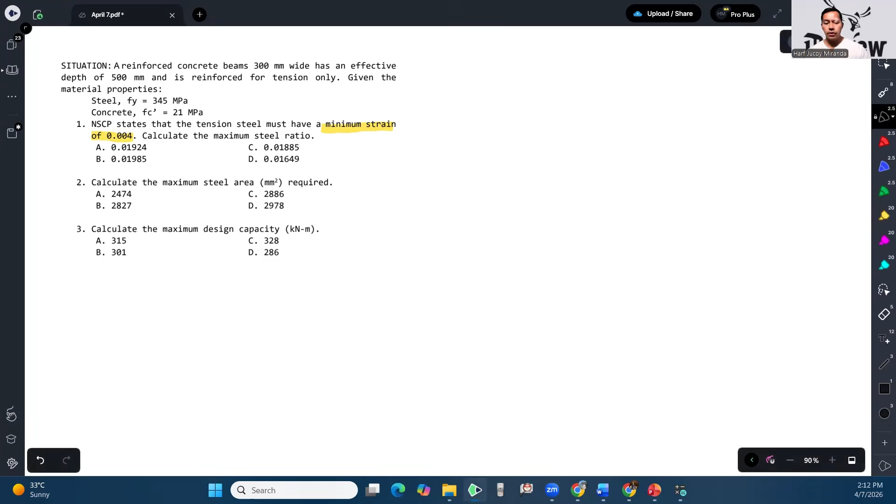So to calculate the maximum steel ratio, first we need to understand what it means for the steel ratio to be maximum. So let's have a beam. Let's say this is our beam, and this is the tension steel.

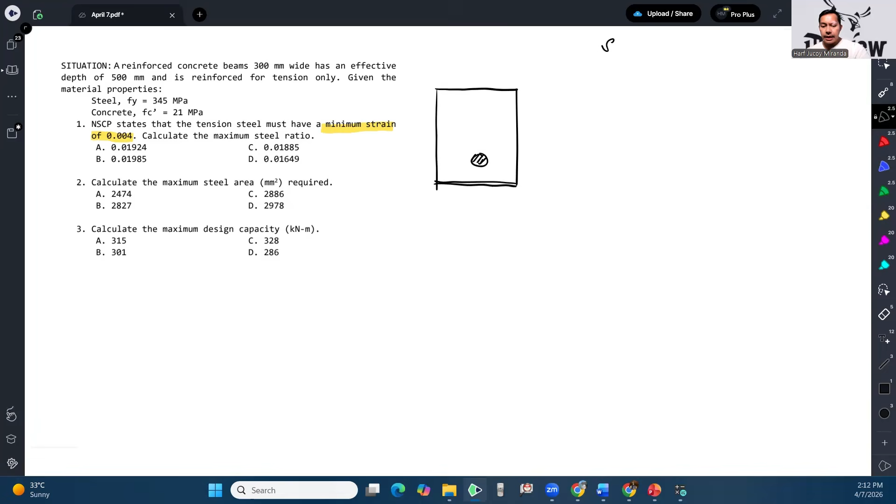We should know from the strain diagram, let's say this is the zero strain. So first, we need to know where the location of the depth of neutral axis is. By definition, the depth of the neutral axis, we designate that as C. Let's say this is the neutral axis, and this is C.

By default, the strain of concrete is 0.003. That's automatic. And the strain diagram should be linear. So if the neutral axis is here, this is what the strain diagram will look like, and this is the strain of the steel.

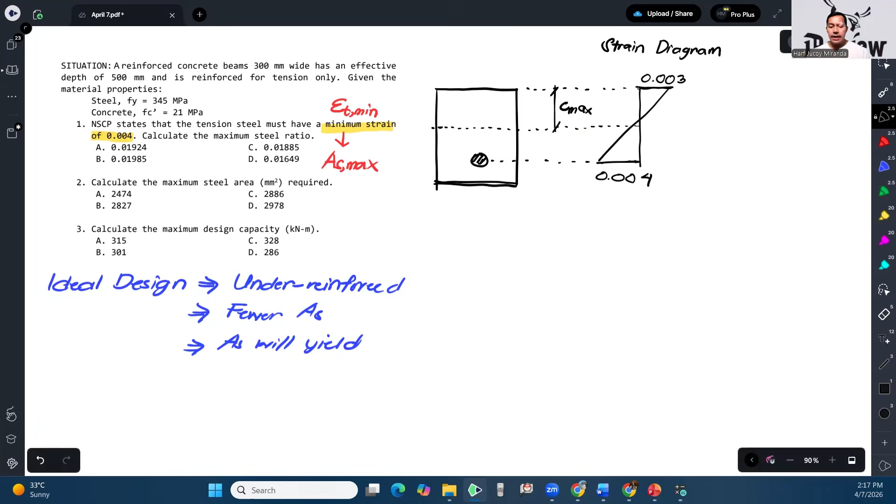And of course, this is our effective depth. By definition, this depth should be the depth of the bottommost steel, that is the effective depth of the extreme steel, when we're talking about the strain diagram.

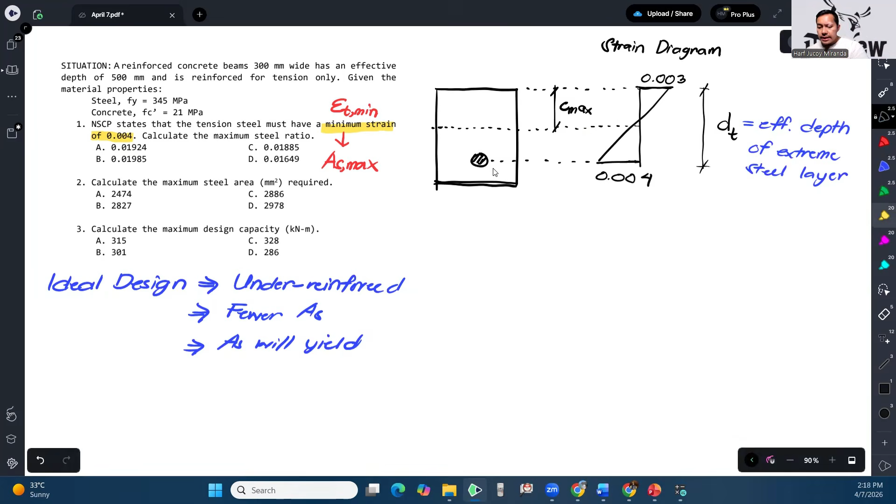Okay, kung multiple layers, pero syempre kung isang layer lang naman yung bakal natin, edi yun na rin yung effective depth natin. But anyway, by ratio and proportion, we can notice that we have this triangle. So actually, we can create this triangle, and we can relate that triangle to this.

So for this one, this will become 0.004 plus 0.003, magiging 0.007. So mangyayari ngayon, for the yellow triangle, we have C maximum divided by 0.003 is equal to effective depth over 0.007. Ilalabas dyan, yung maximum depth of neutral axis according to NSCP should be 3 over 7 of the effective depth.

Okay, so this is based on a maximum strain or minimum strain of 0.004. Now, we must also note that the depth of the compression block, yung equivalent rectangular compression block, is somewhere above the neutral axis. Ito yun.

Okay, so yan naman yung A natin. Since na minaximize nga natin yung depth of compression block, yan na rin yung depth ng maximum compression block. At ang relationship lang kasi nung C at saka A is that yung A natin ay equal sa beta 1 times C. So therefore, yung A max natin is 3 over 7 beta 1 times effective depth.

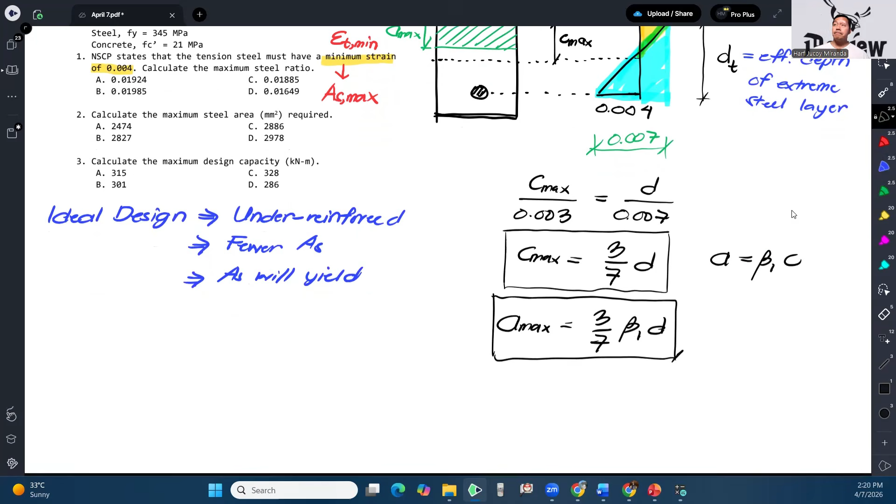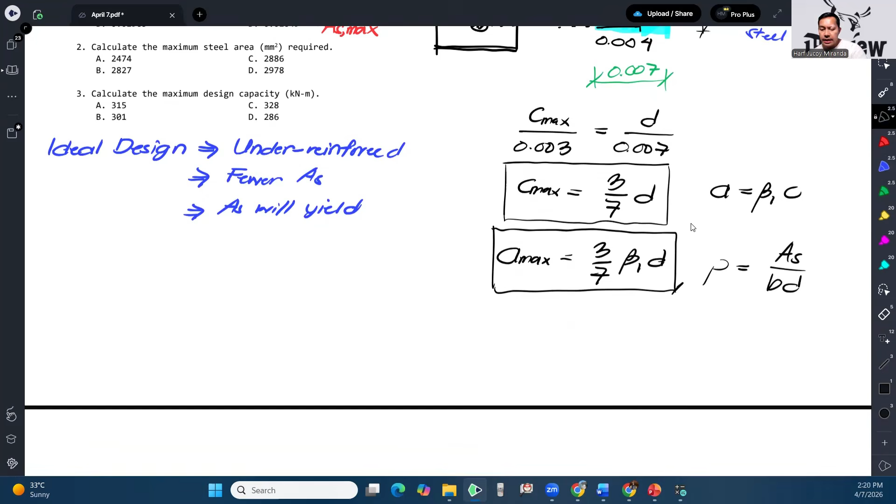Okay, now gusto ko malaman ano yung maximum steel ratio. Yun kasi yung tanong, steel ratio, di ba? So pag sinabi natin steel ratio, that is the ratio of the area ng steel divided by BD. So para mapalabas yan, ipapasok natin yung concept naman ng forces. So if we would go back here.

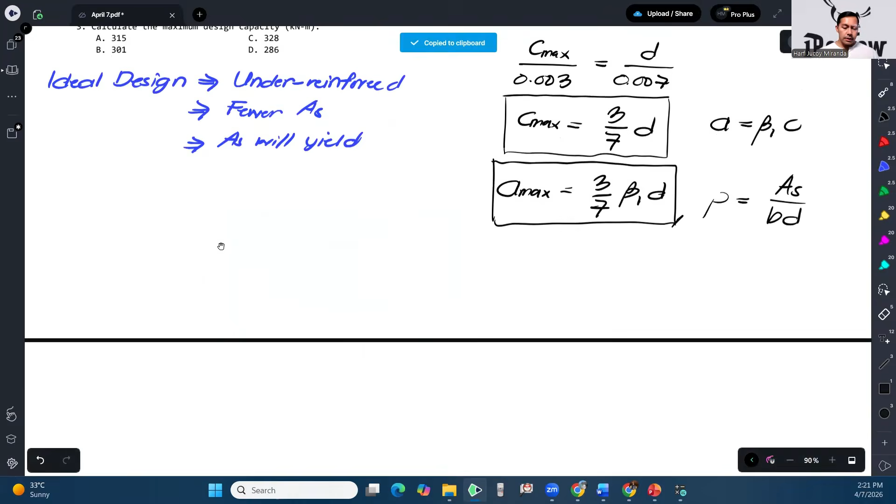Okay, so this is actually stress diagram. Okay, so actually dito meron tayong compression. Okay, yan yung compression ng concrete. At ang equivalent stress ng concrete ay 0.85 of the FC prime.

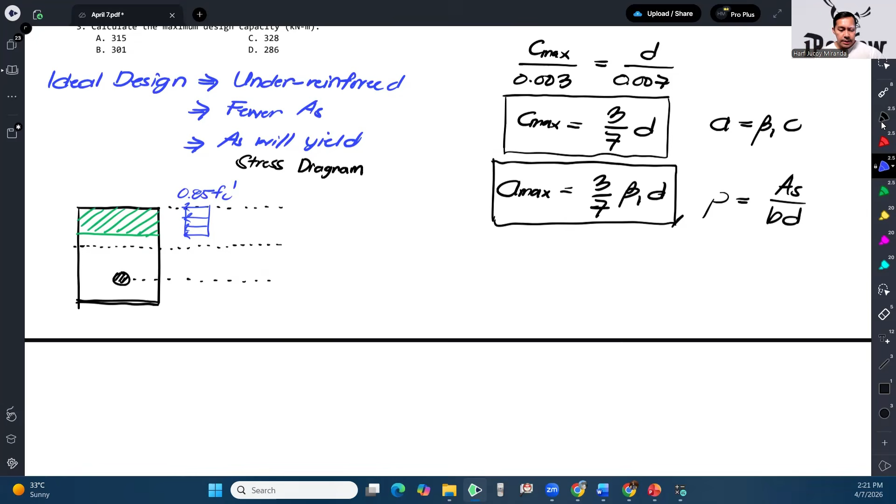Tapos dito naman mangyayari yung stress ng steel. Okay, and ideally, because gusto nating mag-yield yung steel kapag nagde-design tayo, this would be Fy, no? Pero originally ano yan, Fs, ibig sabihin yung stress ng steel. Pero again, it could either be Fy kapag nagde-design - matik yan na Fy kapag nagde-design, no? And then kapag ka nag-investigate, could be either Fs or Fy kapag investigation.

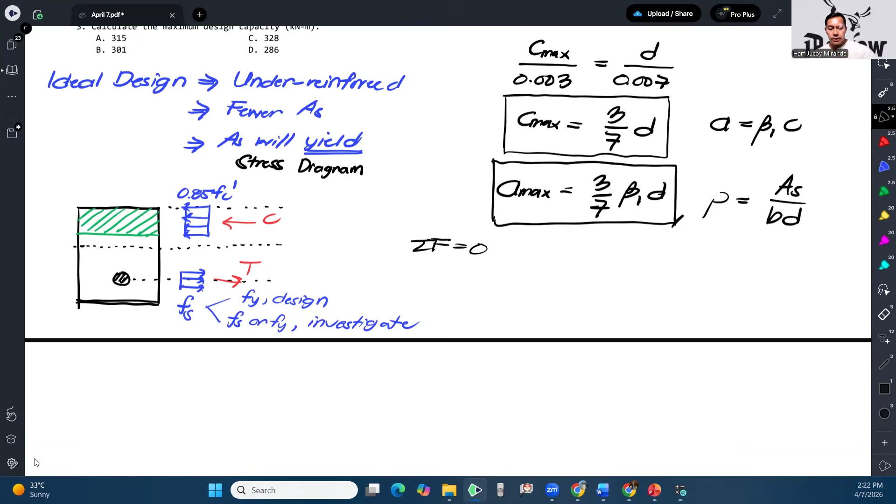Okay, so ibig sabihin, meron dito equivalent force C, tas meron dito equivalent force, tawagin nating T. And dapat, yung dalawang forces na yan ay equal. Kaya masasabi natin na kapag nag-summation of forces tayo, equal to 0, so lalabas lang C equals to T. Now, what is C? So C is yung stress na to multiply this area.

So ano tong area na to? Di ba yan yung A? Tapos, kunwari, ito yung B. Okay, so yung area na yan ay AB, or 0.85 FC prime AB. Parang lumalabas lang yan guys - stress multiplied by area equals force.

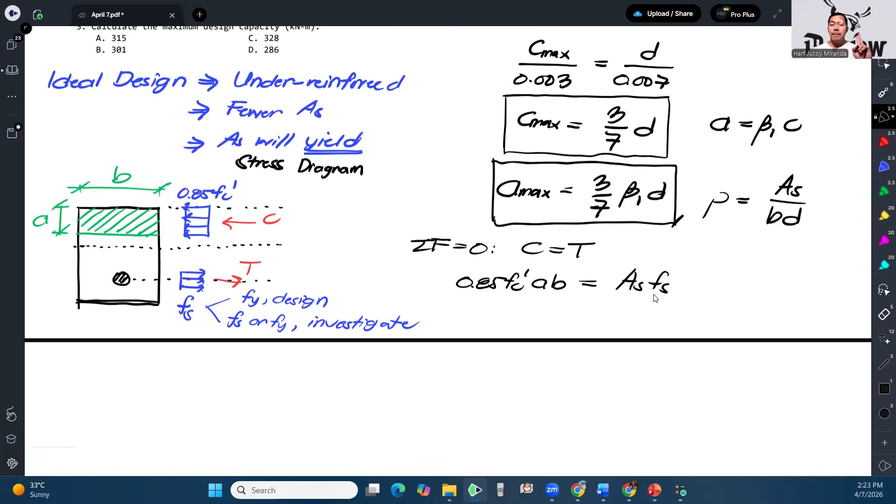Okay, and then equals T. So ano yung T? So yung stress naman dito, multiplied by this area, which is area lang ng mga steel, so therefore this is going to be AS times FS. Okay, so kapag nagde-design, again, automatic, we want this to be FY. Pangalawa, dahil ang hinahanap natin dito ay maximum steel ratio.

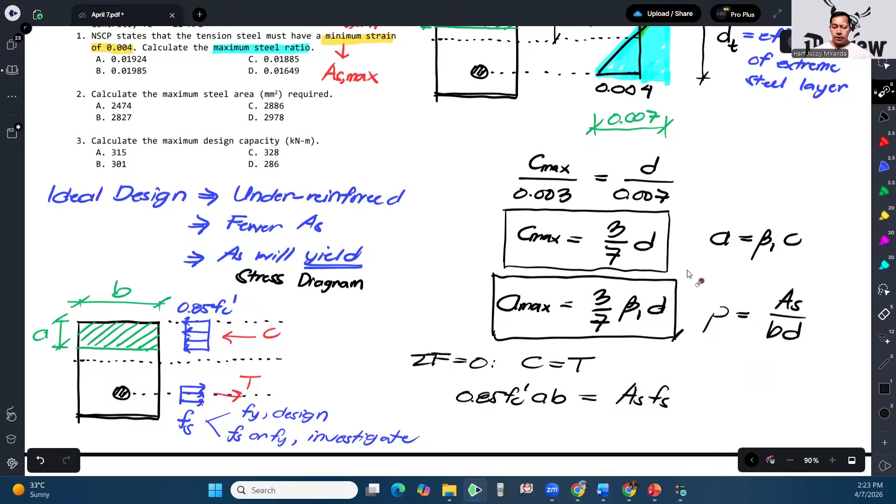So ibig sabihin, yung maximum steel ratio natin ay merong strain na 0.004, di ba? So ibig sabihin ganito. Note, when the strain in the tension steel is 0.004, mas malaki na yan sa tinatawag natin na yield strain. Ano yung yield strain ng bakal?

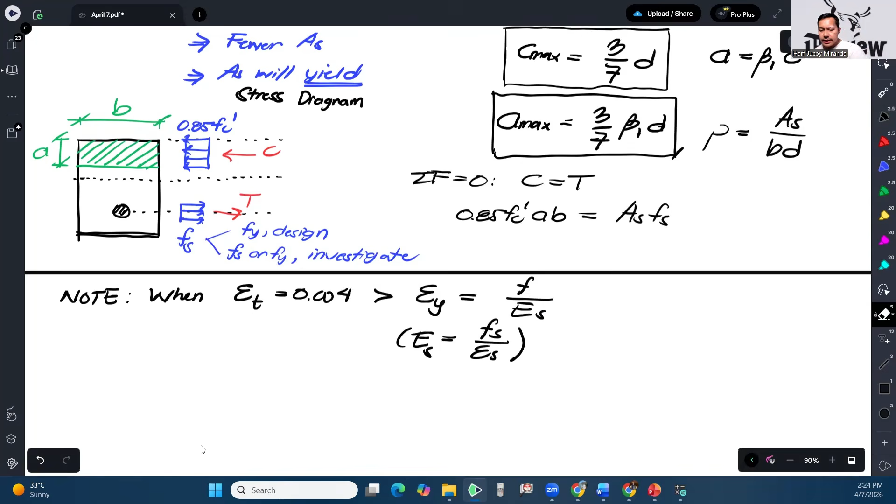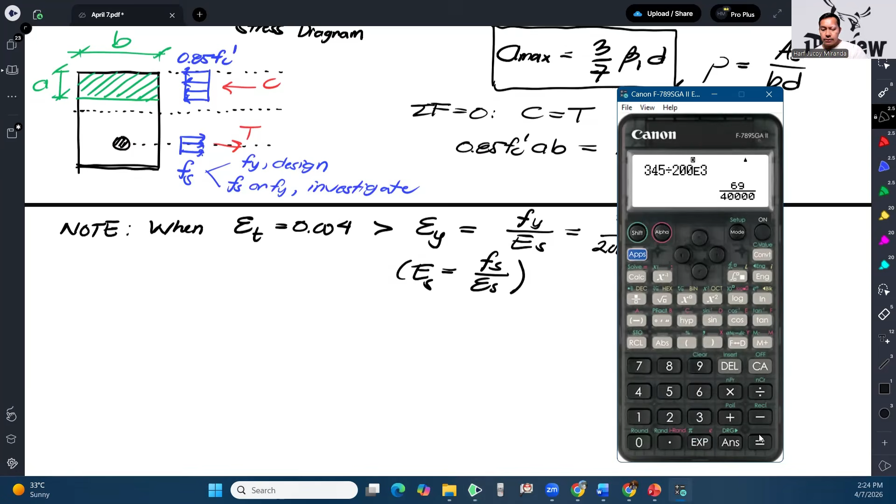Eh di ano lang, kasi di ba ang stress, ang modulus of elasticity ay stress over strain. Okay, so ibig sabihin, yung strain ay stress of the steel over modulus of elasticity of the steel. Na kung saan, kung yield nga yan, edi ito dapat ay yield stress. Okay, so sa problem na to, ang yield stress natin ay 345, divided by ang modulus of elasticity ng steel ay 200,000. Pag kinompute natin yan, we have 345 over 200,000, that would give us 0.001725.

So what does this tell us? This is telling us that the strain, when the strain in the steel is 0.004, it is already beyond the yield strain. Therefore, Fs is already greater than Fy. So therefore, the steel already yields - steel yields at maximum steel ratio. Okay, so therefore, automatic, ito, papalitan na natin ng Fy.

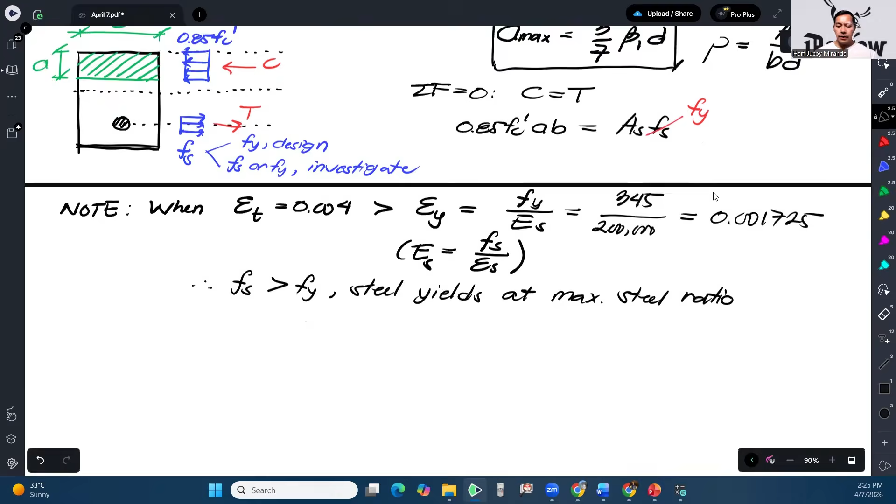Okay, so ipasok lang natin yan dito. So, 0.85 FC prime, dahil nasa maximum tayo na stage, gagawin ko tong A max, B is equal to AS Fy. Now, para lumabas yung steel ratio na AS over BD, ang gagawin ko lang is mag-multiply ako, or magdi-divide ako ng BD on both sides of the equation.

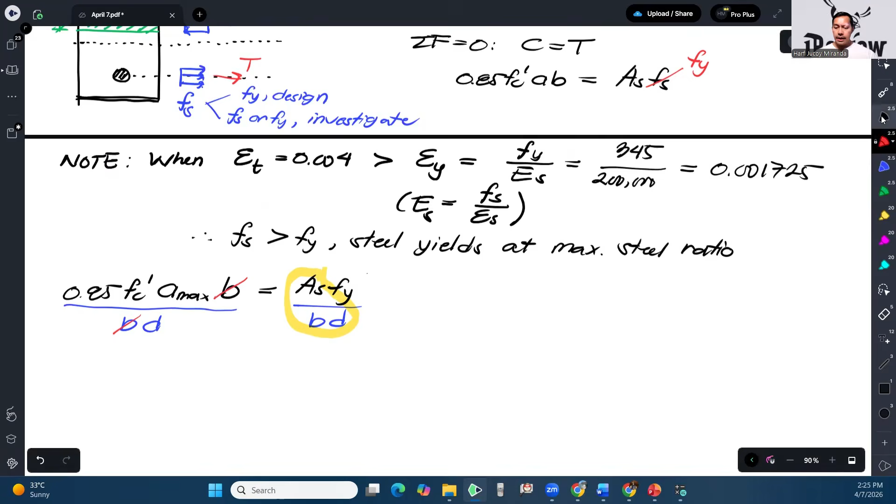Para lumitaw dito yung steel ratio. Di ba yun yung steel ratio, no? So, simplify lang natin. Magka-cancel ito. Okay? And then, magiging ganito: 0.85 Fc prime A max over D

equals rho, dahil max na yan, so max na to, no? Fy. Ayan. Okay? Now, lumilitaw that rho max, kapag sinolve natin, will become like this. So, 0.85 Fc prime over Fy, okay, times A max over D. Ni-rearrange ko lang. Okay? So, babalikan ko lang. Ano nga ulit yung A max? Ang A max ay ito, 3 over 7 beta 1 D. So, pwede natin i-substitute. So, pag sinubstitute natin yung dito, nga pala, no?

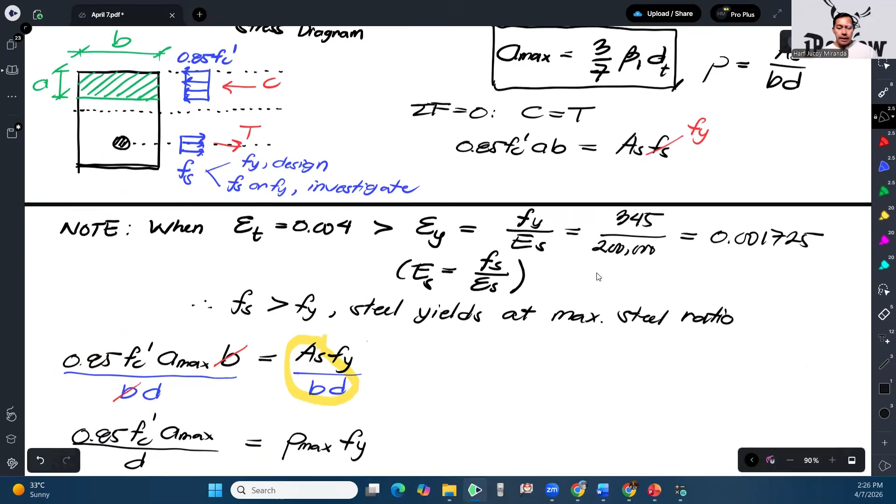To be more specific, again, ito ay DT, effective depth ng extreme tension steel layer. Okay, so palitan natin to ng 3 over 7 beta 1, 3 over 7 beta 1 dt over d. Okay? Now, rearranging the parameters, so lalabas ngayon that rho max is equal to 3 over 7 times 0.85 Fc prime beta 1 over Fy times dt over d. So, yan ngayon yung maximum steel ratio.

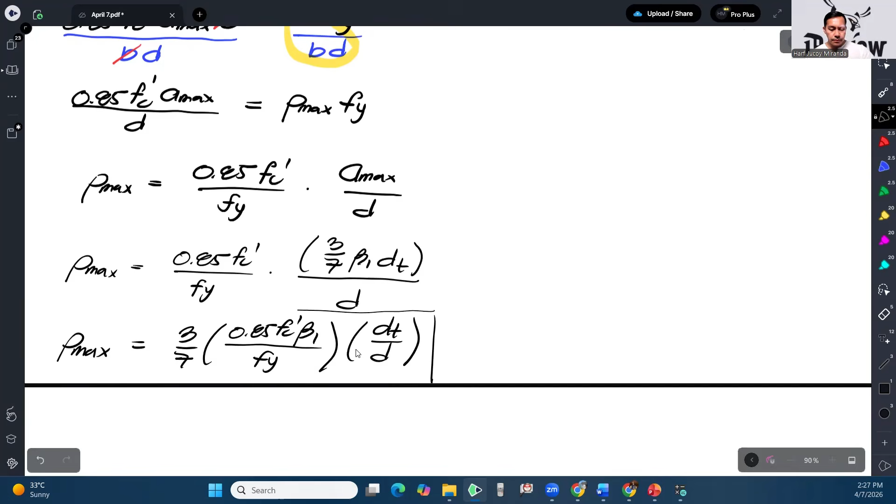Okay? And for single layer, lalabas lang na yung extreme effective depth ay equal lang din sa overall effective depth. So therefore, magka-cancel lang yon. So yung rho max lang natin ay magiging 3 over 7, 0.85 Fc prime beta 1 over Fy.

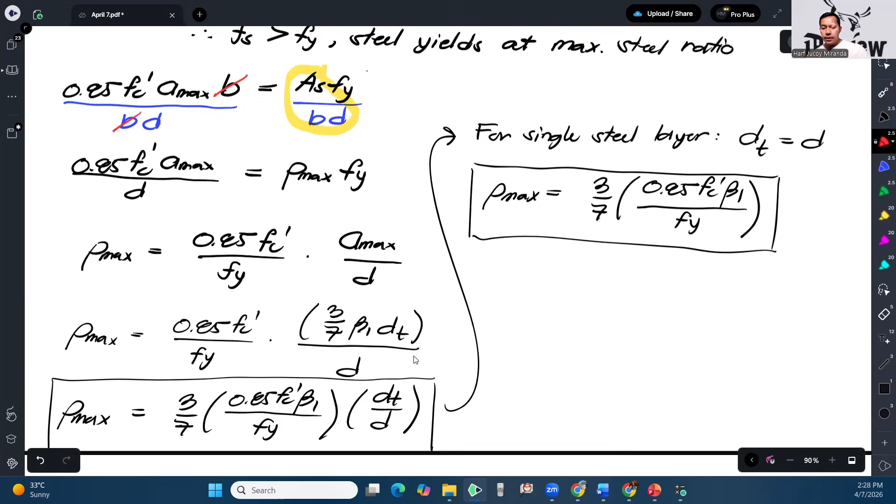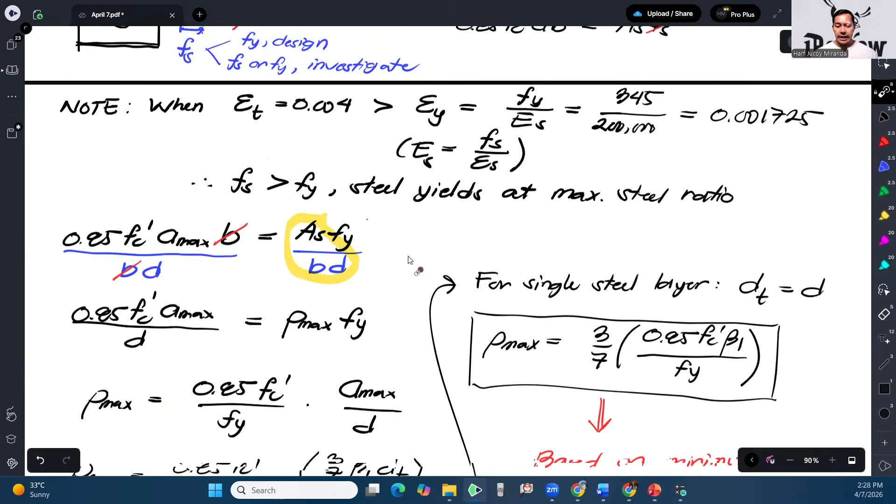Okay? So itong mga rho max na to is based on minimum strain of 0.004. Okay? And yun yung sabi sa problem. No? And by default talaga, kasi yun yung nakastate sa NSCP, ito talaga dapat yung maximum steel ratio natin. Okay? Or ito. And with that, let's calculate number 1.

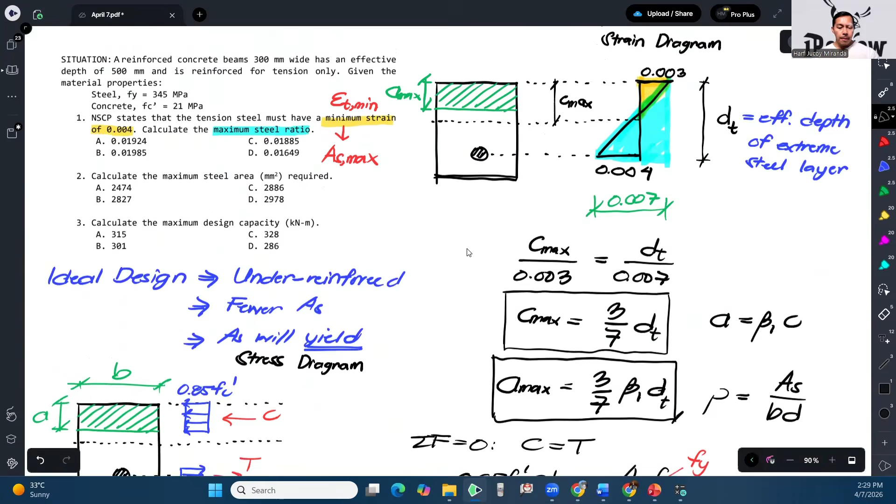So given naman lahat, so i-substitute lang natin. So for number 1, our maximum steel ratio would be 3 over 7, 0.85. Fc prime for this problem is 21. And yung beta 1 natin is also 0.85 over Fy 345. And then, that's it. No? Kasi wala naman tayong multiple layers. So, single layer lang siya. So, magka-cancel lang ito.

Magka-cancel lang ito. Okay? And also note that for beta 1 is equal to 0.85 kapag yung Fc prime natin ay less than or equal to 28 megapascals. Okay, and that is also equal to 0.85 minus 0.05 over 7 Fc prime minus 28 kapag yung Fc prime natin ay greater than 28 megapascals. So sa case na to, kaya siya 0.85 kasi Fc prime natin is just 21.

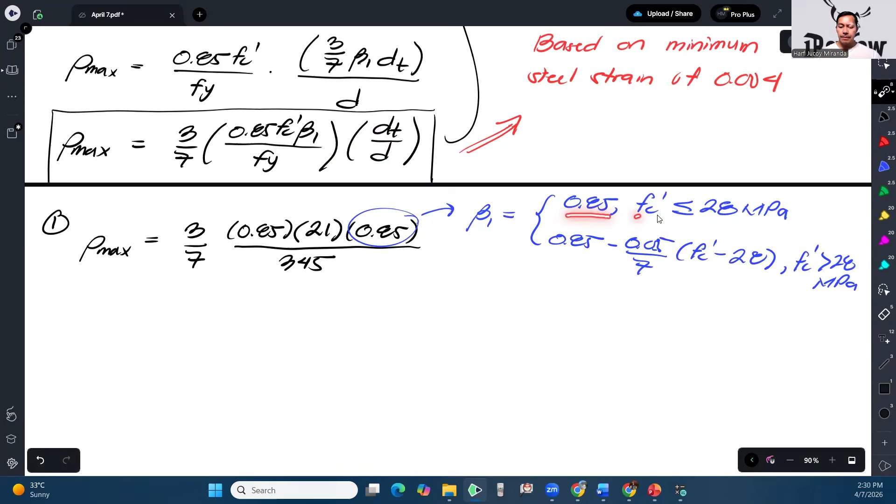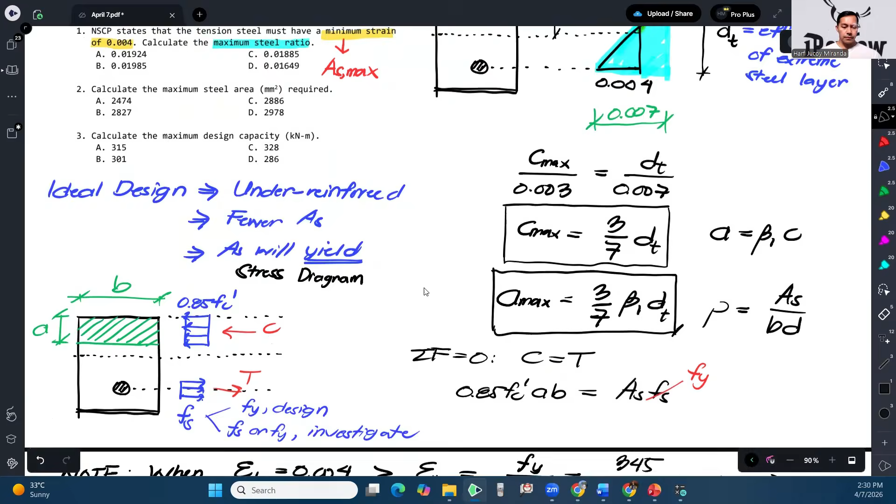Okay? So therefore, our maximum steel ratio is, okay, so 0.01885. Okay? And that would be our answer. Okay, that is letter C.

Next, for number 2, calculate the maximum steel area required. So for number 2, continuation ng number 1. So since rho is equal to AS over BD, so therefore, AS is equal to rho BD. And because maximum yung hinahanap, dapat maximum din yung steel ratio na gagamitin, which is ito na yun. Okay? So therefore, if you would calculate that, 0.01885 times B, yung B natin ay 300, yung effective depth 500.

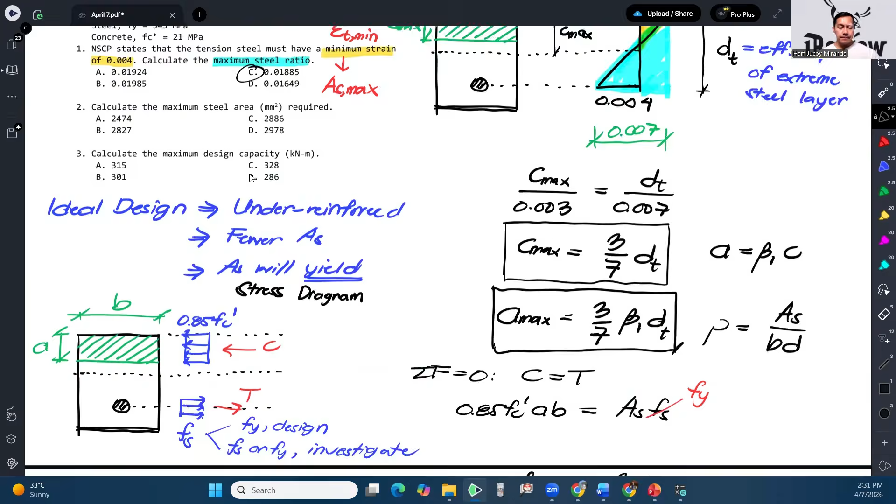Okay, so our maximum steel area is around 2827.17 millimeters squared. Okay, and that would be our answer for number 2.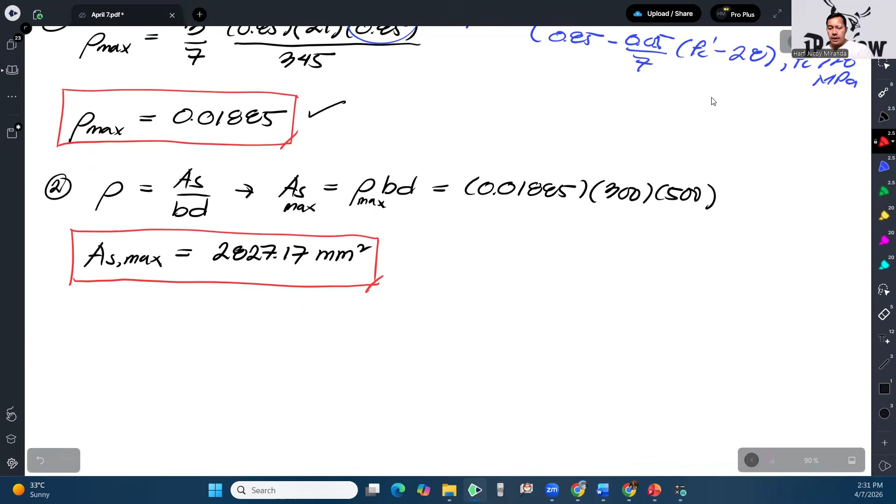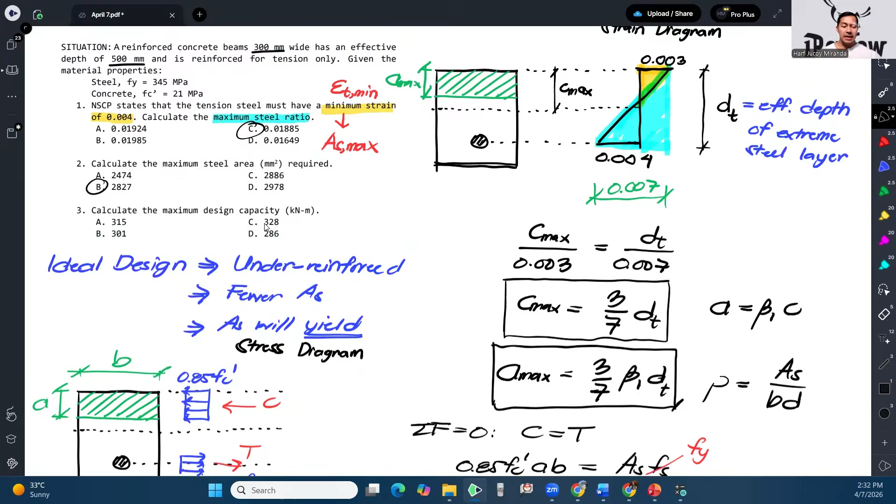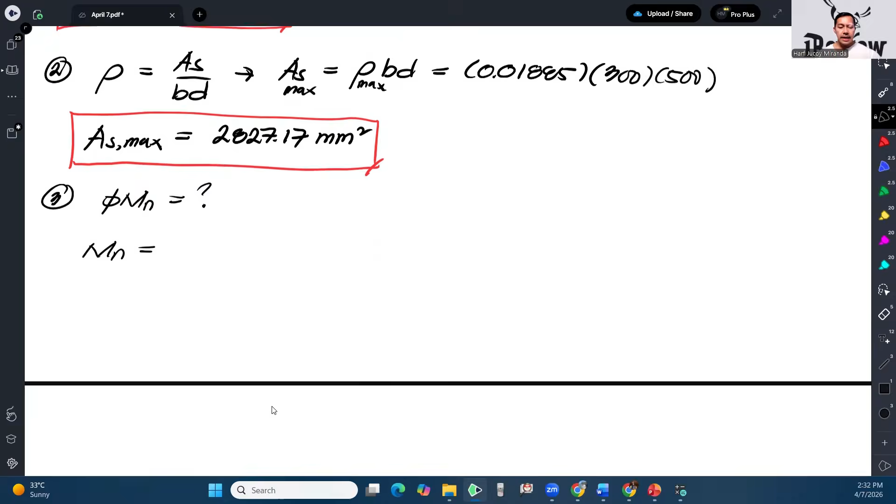For number 3, calculate the maximum design capacity. So maximum, ibig sabihin, pinama-maximize din yung area ng bakal. So for number 3, we need phi MN. Okay? So yung MN is the nominal bending moment strength. And what is that? So basically, kung babalik tayo sa force and stress diagram, basically yung moment lang na ipoproduce either ni compression or ni tension kasi coupled to eh, di ba?

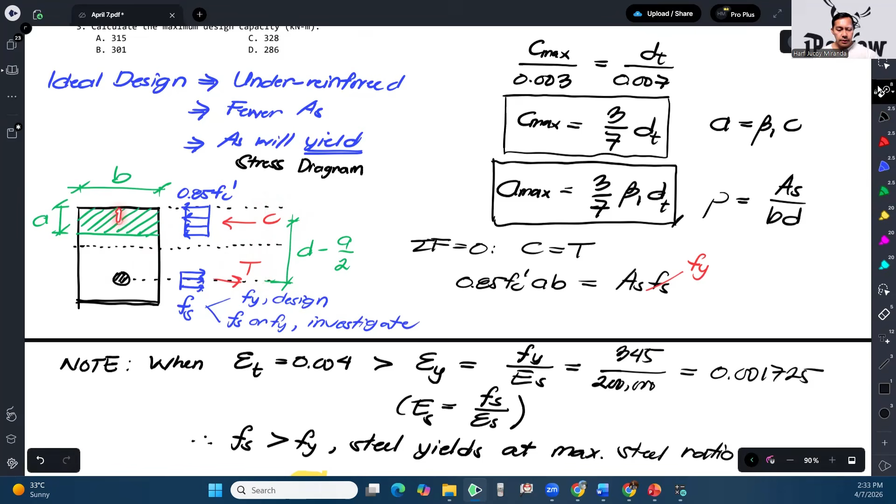So pwede na pag nag-moment ka dito, ito yung ikot, no? So C times this distance. Kapag dito ka naman nag-moment, that's T times this distance. So yung distance na to, kapag rectangular beam, is palaging D minus A over 2. So, bakit D minus A over 2? Kasi mula sa taas hanggang sa baba is yung effective depth. Tapos mula sa taas hanggang dito, that is half nito. So, half ng A. So, that's why minus A over 2.

So, therefore, yung nominal moment capacity natin is pwede na C times D minus A over 2. Pwede rin na T times D minus A over 2. Okay, so kung C ang gagamitin, edi 0.85 FC prime AB, yung C. So, D minus A over 2. Kung T ang gagamitin, AS, FS, times D minus A over 2.

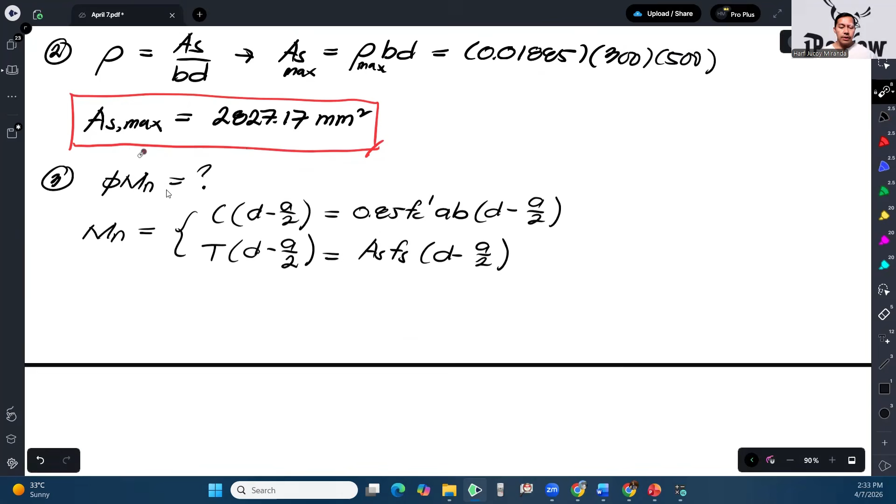Okay? So, dito, syempre, I think, mas convenient kung gagamitin na lang natin itong AS kasi meron na tayo nito eh. Diba? Kaya maganda na lang dito itong pangalawa gamitin natin. So, that is AS max. Again, kung maximum na yung steel ratio, nag-yield na yung bakal, as explained earlier, times D minus A over 2. Yung A na to, max din, kasi naka-maximum steel ratio tayo eh. Okay? So, kumputin ko lang dito sa gilid ko ano yung A max ha.

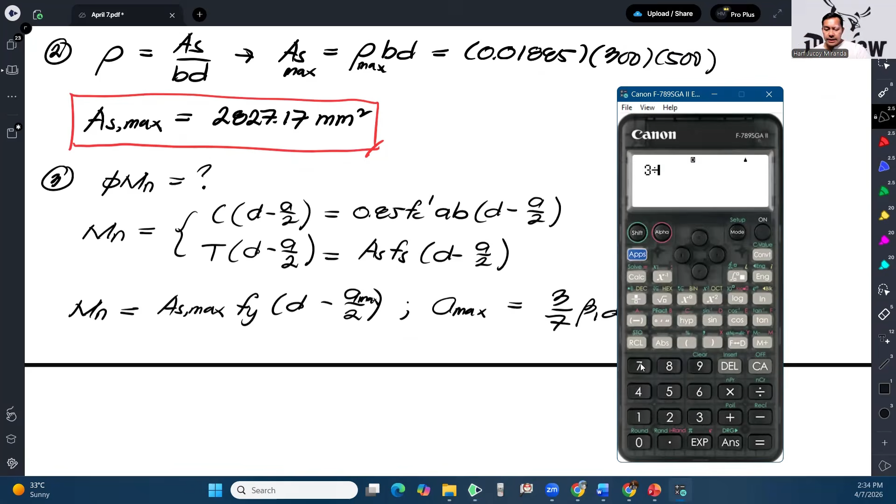That is 3 over 7 beta 1 D. No? So, kumputin ko lang diretso ha. So, 3 over 7, ang beta 1 ay 0.85. Yung D na given, 500. So, that gives us this 188.571.

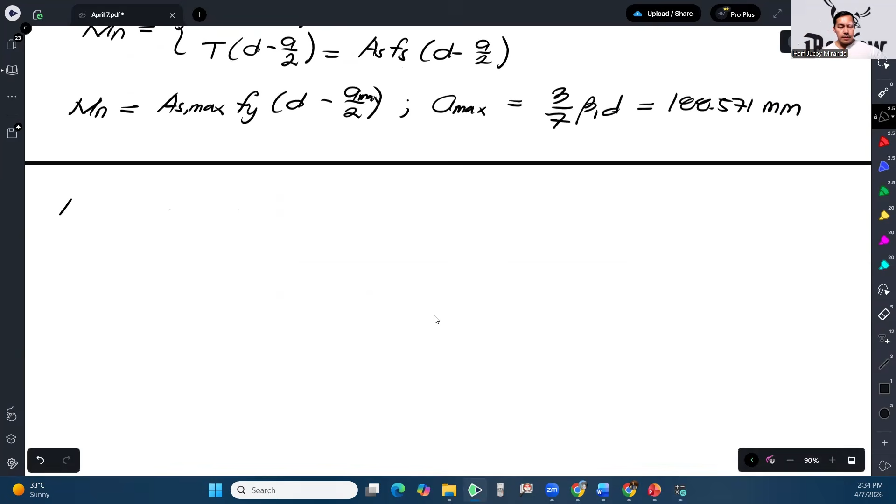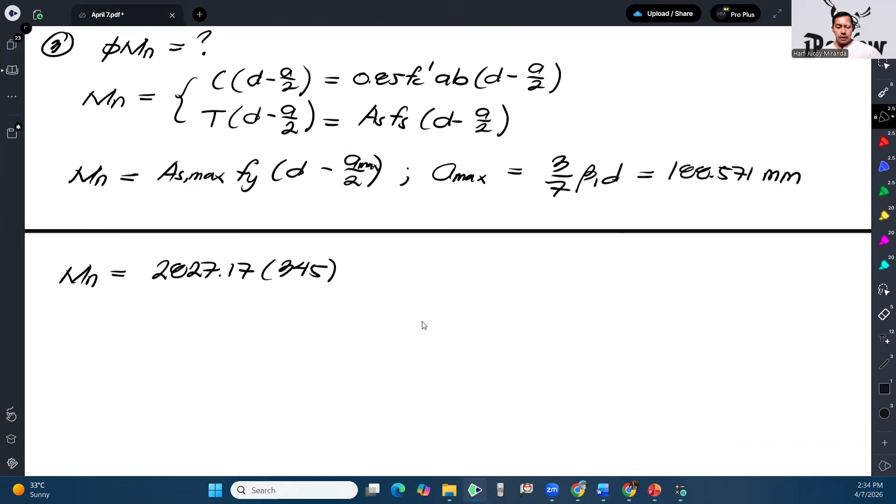Okay? So, substitute lang natin lahat. 2827.17 FY effective depth minus A over 2.

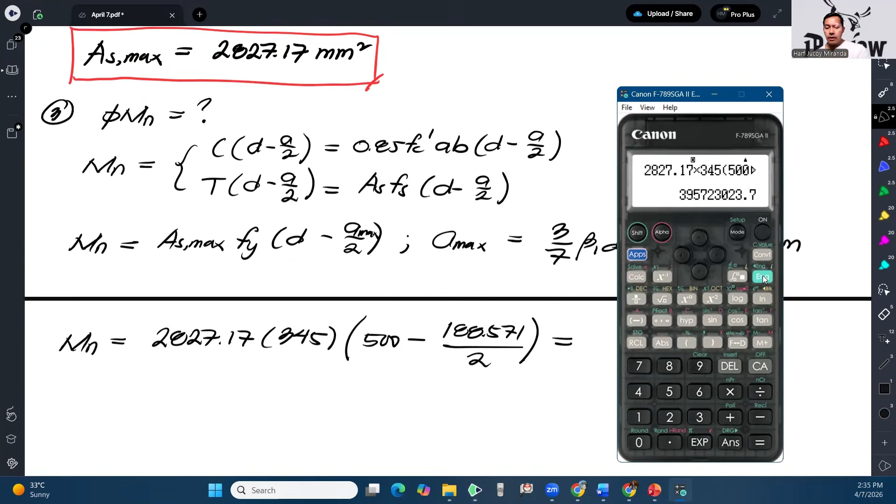Okay, so the answer here will be in Newton-mm. So para maging kilonewton-meter, i-divide mo lang ng 1 million. So 395.72 kilonewton-meter. Okay, so ito na-compute natin, this is just our nominal moment capacity.

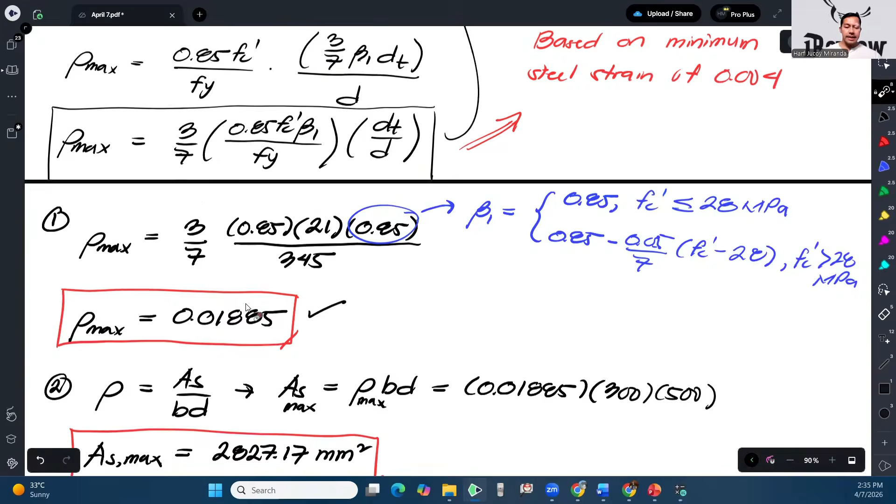Okay, nominal pa lang yan. So ang pinapahanap kasi sa problem, design or ultimate capacity. So ibig sabihin, multiply pa natin ng reduction factor.

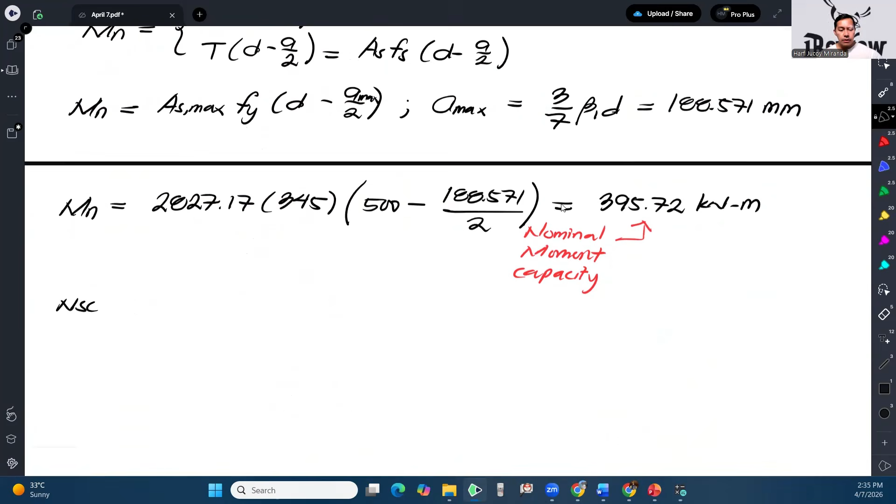Okay, so here we have to be careful. Kasi ang reduction factor natin according to NSCP 2015 ay nagva-vary. Kapag daw tension controlled yung design natin, okay, so that means yung tensile strain ng steel ay lagpas or equal sa 0.005, yung reduction factor natin will be 0.9.

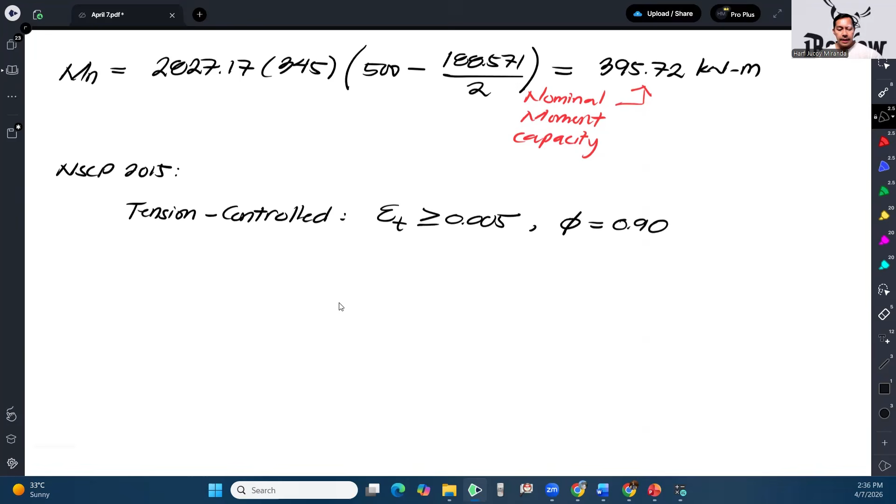Kapag naman compression control, yung strain natin ng steel, tinatawag natin yan na compression control, kapag yung strain ng steel ay mas mababa sa yield strain, which is yung explain ko kanina na Fy over Es. Kapag mas mababa siya dyan, ibig sabihin, compression controlled siya. So, ang phi natin ay 0.65.

Ngayon, kung mapapansin natin, meron ditong in-between. So, yung in-between na yon, that is when the yield strain which is equal to Fy over Es ay mas malaki... yung actual strain natin, mas maliit, I mean mas malaki dun sa yield strain pero mas maliit, mas maliit sa 0.005. Ito yung tinatawag natin na transition zone.

Ang phi natin dyan will also be less than 0.9 but greater than 0.65.

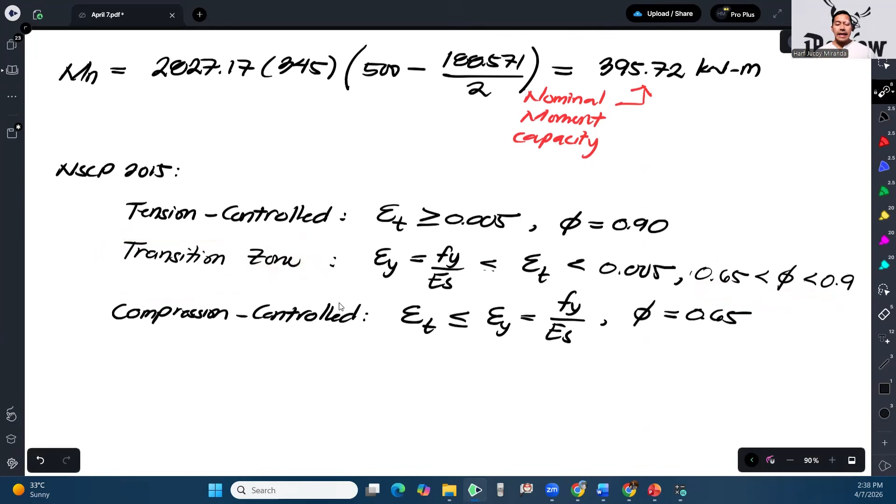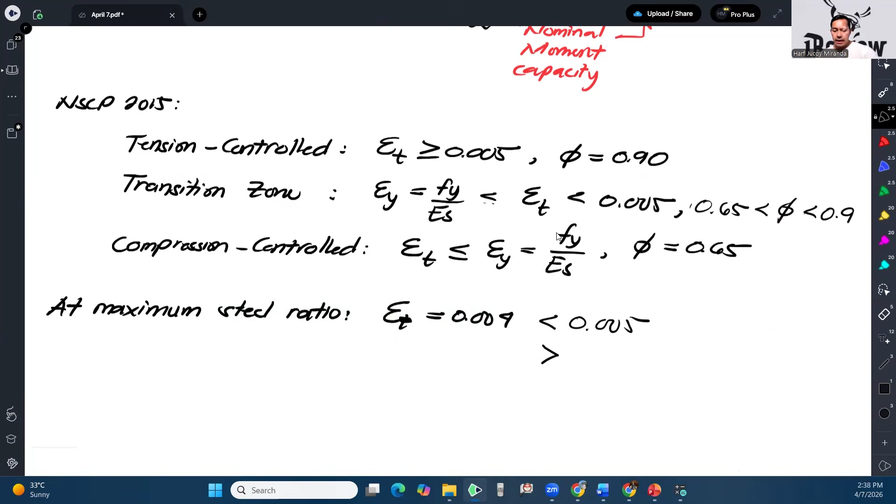Okay, so paano natin malalaman? So mag-interpolate tayo kapag nandito tayo. Now, here's the catch. Di ba, yung strain natin kapag maximum condition is 0.004. Okay, yung 0.004 is mas mababa sa 0.005.

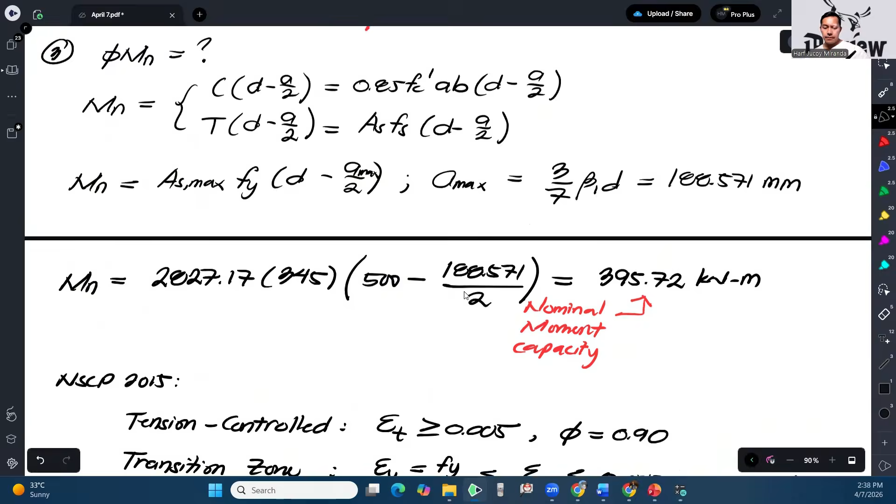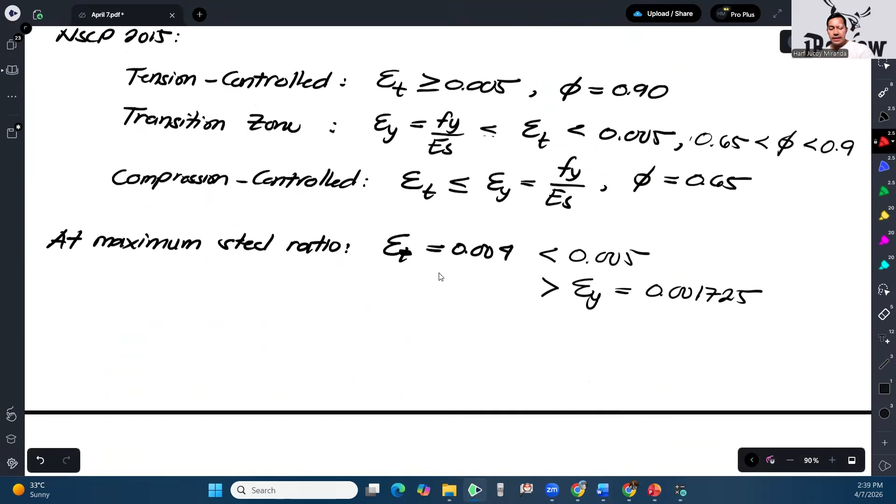Pero mas malaki siya sa yung yield strain na kanina kinompute natin, na ito 0.001725. Kaya ibig sabihin itong case na to at maximum steel ratio is actually transition. So hindi siya phi equals 0.9, na? So iso-solve pa natin yung phi. Kasi transition zone. So how do we solve for phi?

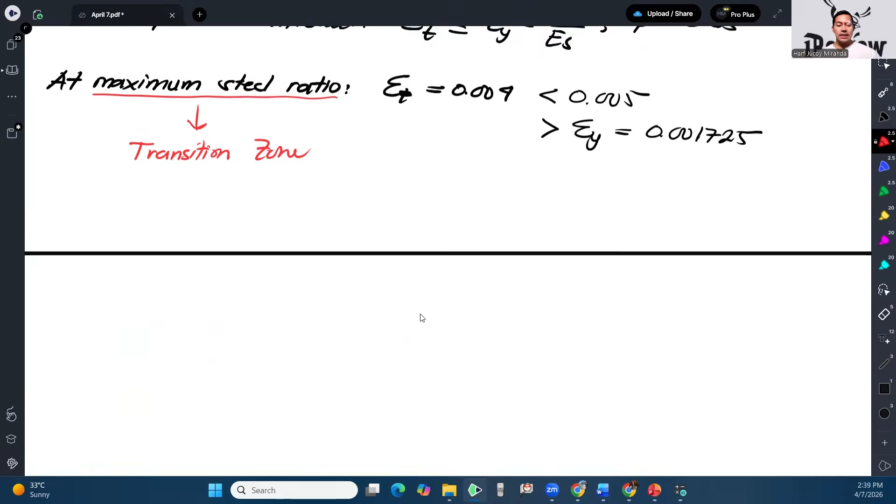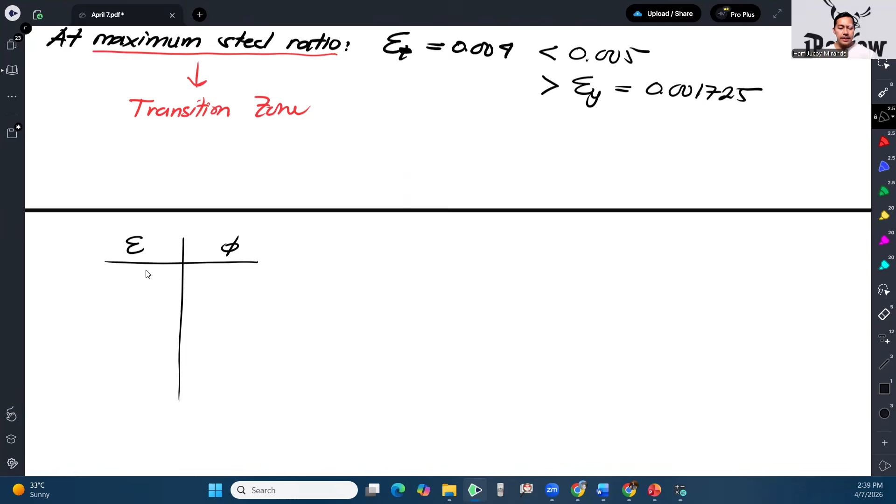So pwede tayong mag-interpolate. So pwede natin gawin na ganito: ito na ilagay yung yields, yung strain, tapos ito na ilagay yung phi. Di ba kapag ang strain natin is yung yield strain na 0.001725, ang phi natin dyan 0.65 kasi yan yung compression control. Pero kapag naman yung strain natin ay 0.005, yan naman yung tension control, so ang phi natin is 0.9. So yung hinahanap natin is something in between.

Okay, and with that, we can utilize our calculator. So you can just go to mode stat, tapos linear, and then i-type lang natin sa table itong mga ito. So sa X, lagay natin 0.001725, tapos sa susunod ay 0.005. And then para sa Y, we have 0.65 and then 0.9. So yung Y yung phi natin. And then just press CA or AC.

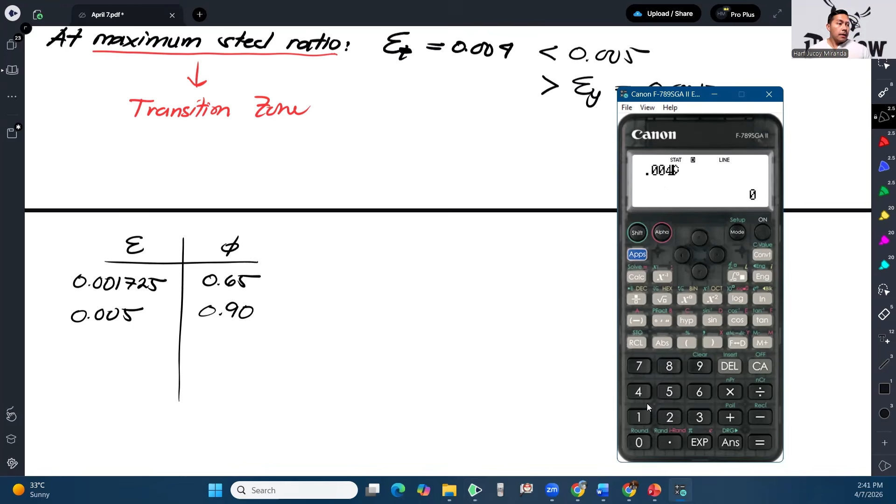And then we will apply regression. So press options, no, kung nakakanan kayo. Okay, so regression. And then again, ang hinahanap natin is yung Y, which is nandun yung phi. And then ilagay mo lang sa harap yung equivalent strain na hinahanap mo, which is yung 0.004. And that gives us 0.82366.

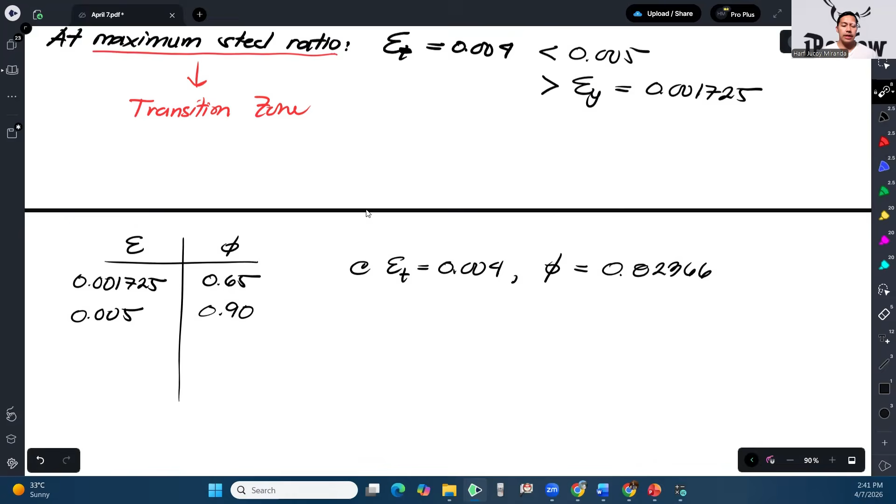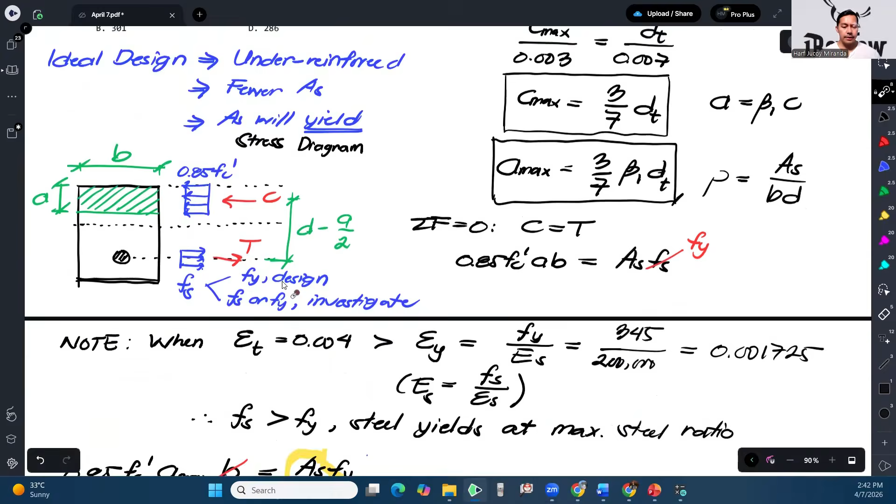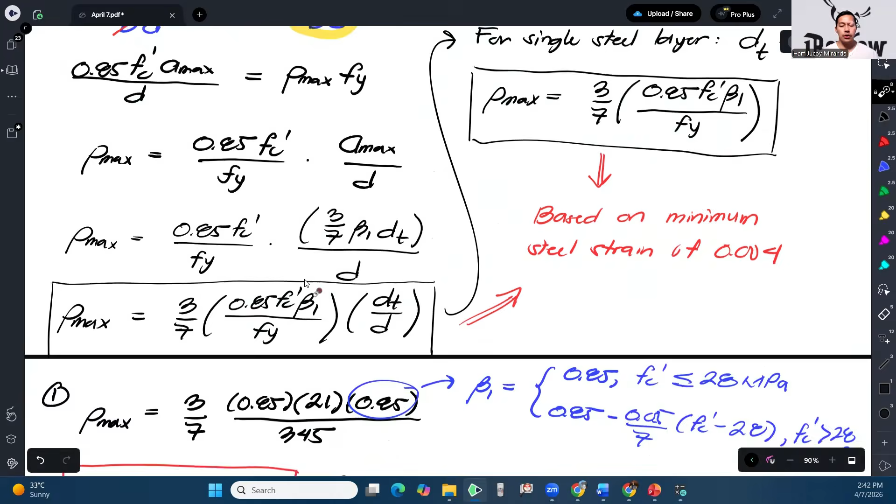Okay, so ganyan, no? Okay, so yun yung issue dito sa part ng pag-compute ng maximum steel ratio for NSCP 2015. Kaya yung iba, ang ginagawa, kasi total, ang ideal na design ay under-reinforced and at the same time, tension controlled. Ang ginagawa ng iba ay hindi na sinusunod yung sinabi ni NSCP na ang minimum strain ay 0.004.

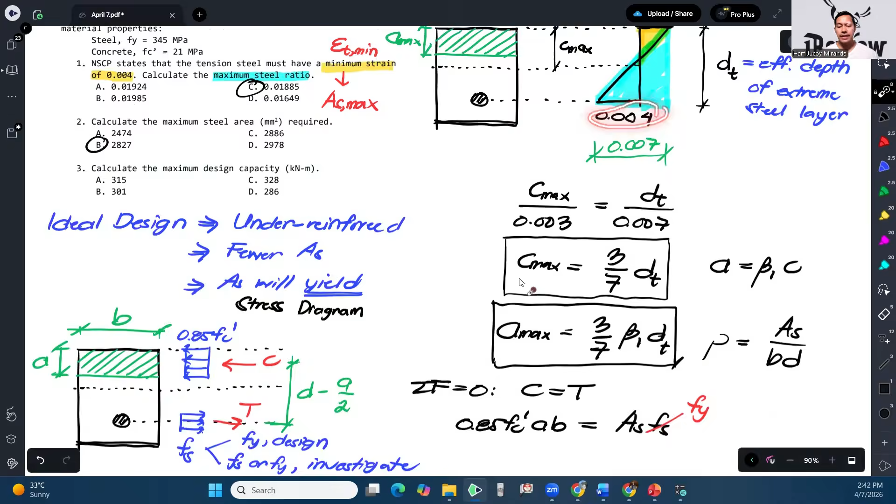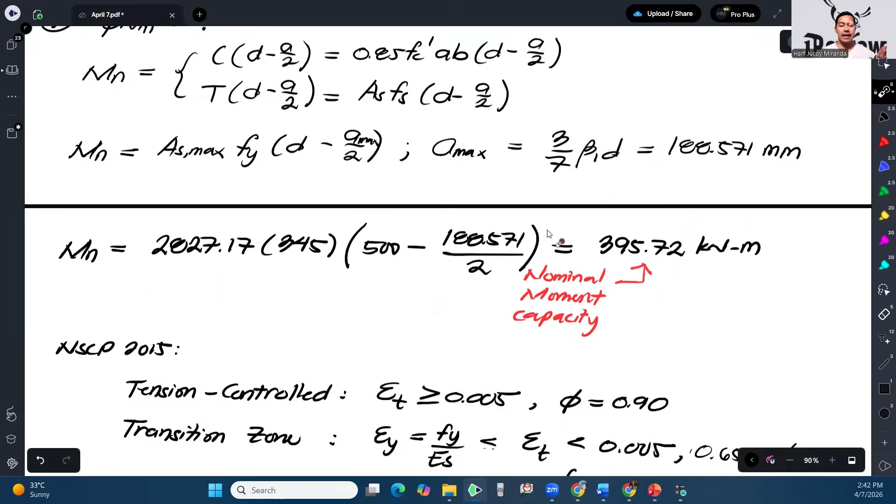Ang ginagawa ng iba ay tinataasan yung minimum, which is okay lang naman, safe pa rin naman yun, kasi ito nga yung minimum. So tinaasan. Ang ginawa nila, sinakto na lang nila na 0.005 para sakto rin na tension controlled siya at yung phi mo automatic 0.9 na. Kaya yung ibang formula ng rho max is ito magiging 3/8. Yun lang naman yung pinagkaiba. Ito ay 3/8, at 3/8 yan kapag ang design mo is naka-base sa tension-controlled condition. Kapag gusto mo tension-controlled condition na kagad, 3/8 ito, tapos yung phi mo, 0.9 na kagad.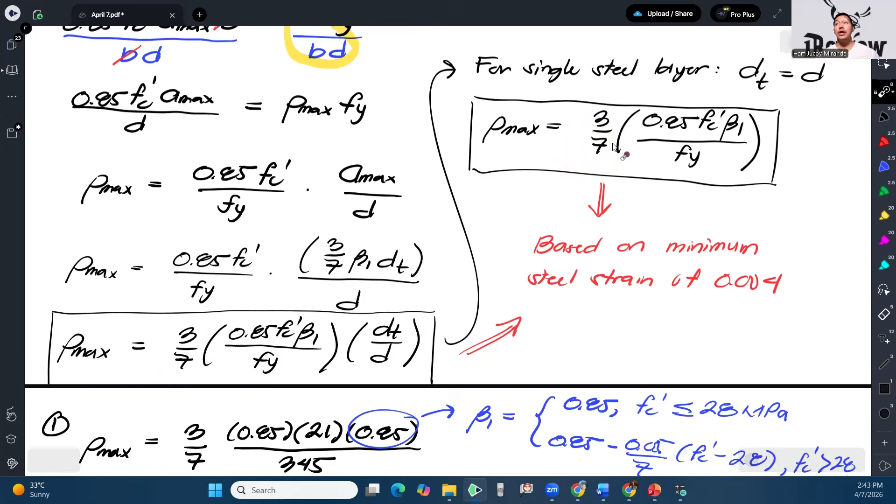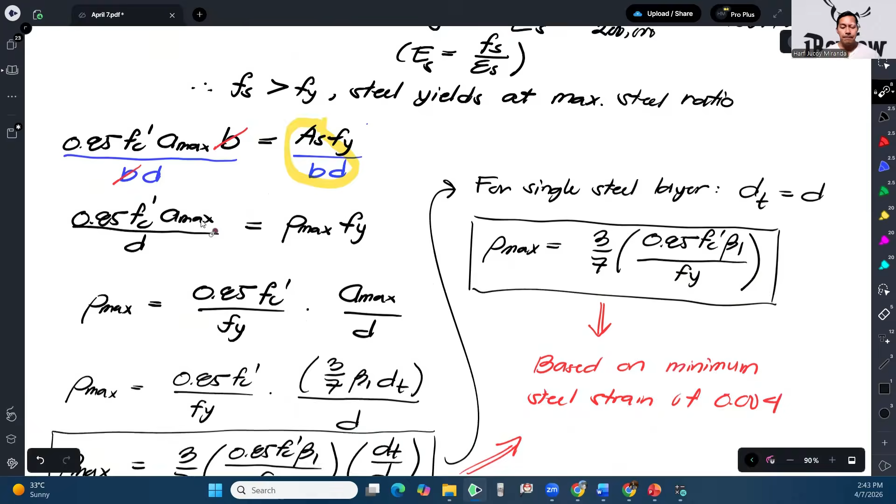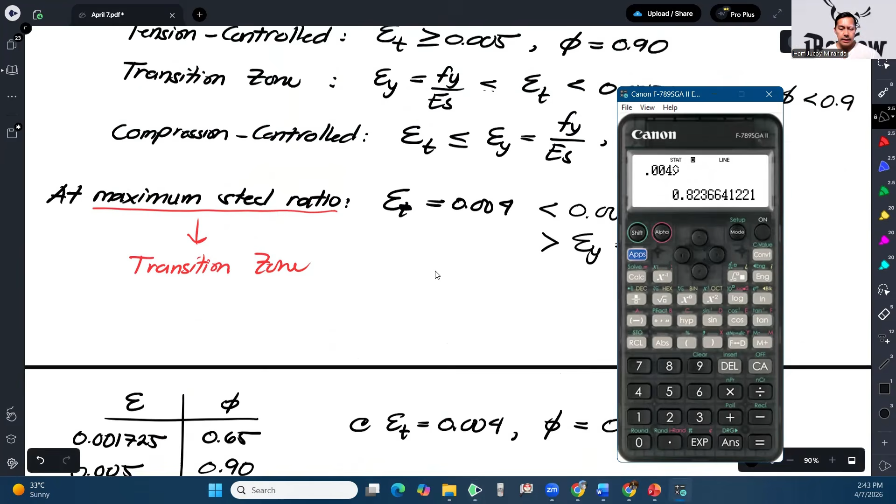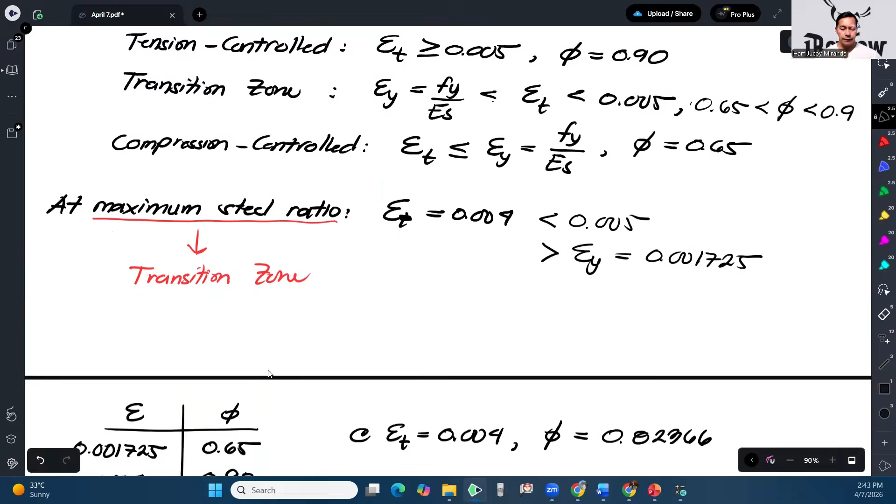Okay, pero sa problem kasi na to, sa context ng problem, wala namang sinabing ganon. So actually, in-specify pa nga talaga yung sinabi sa NSCP. Kaya ang susundin natin is ano talaga nakalagay sa NSCP. Okay, but anyway, since that is our phi, so all we have to do is to multiply that to get our design capacity. Multiply lang natin sa ano nga yung nominal natin, 395.72. So, 325.94. Okay, and that's how we solve this problem.

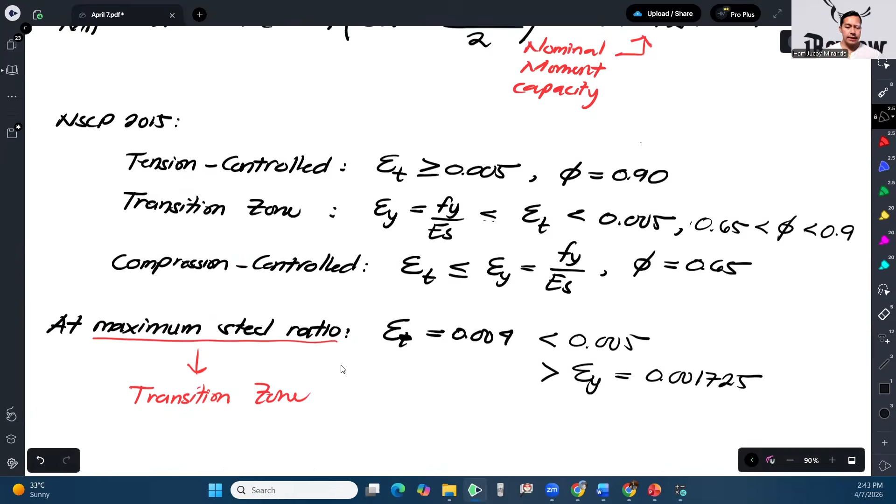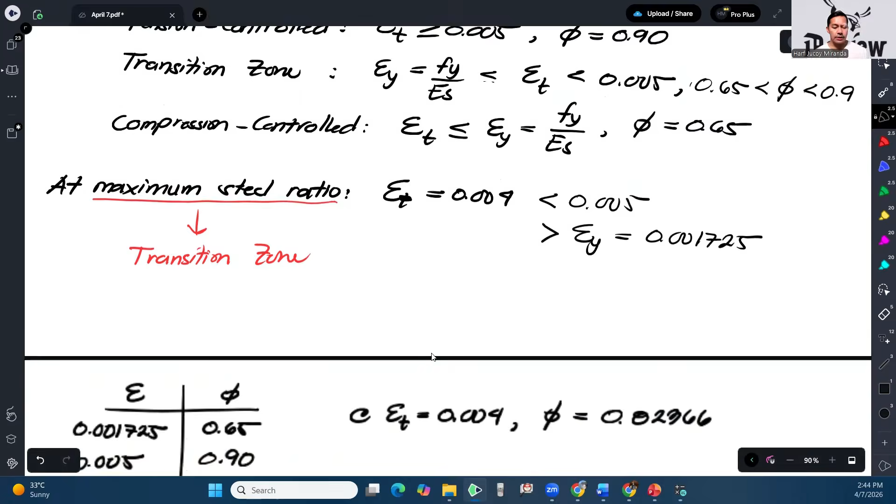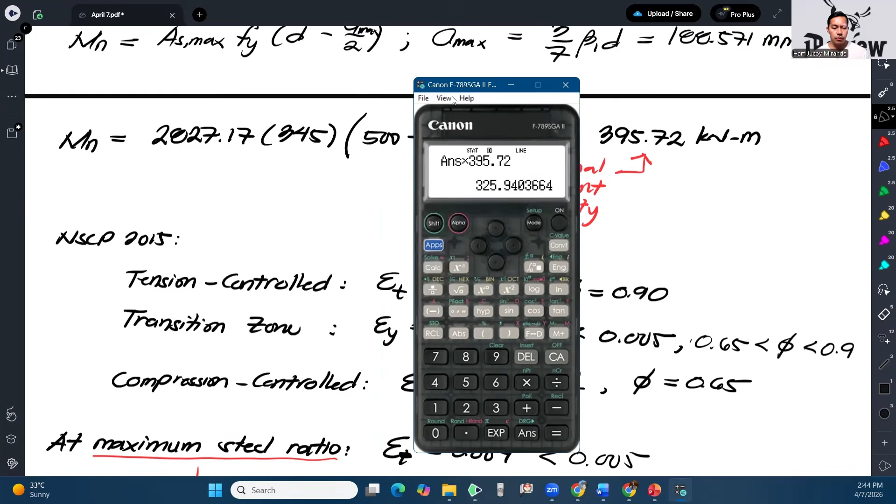So the answer here would be, we can approximate to be letter C na lang, kasi yun yung nearest. Okay, kasi yung choices dyan is nag-round off eh, yung akin kasi hindi ako nag-round off. Tama ba? Double check ko lang, 395. Tama naman, 395.72. Okay, so that's how we solve this problem.